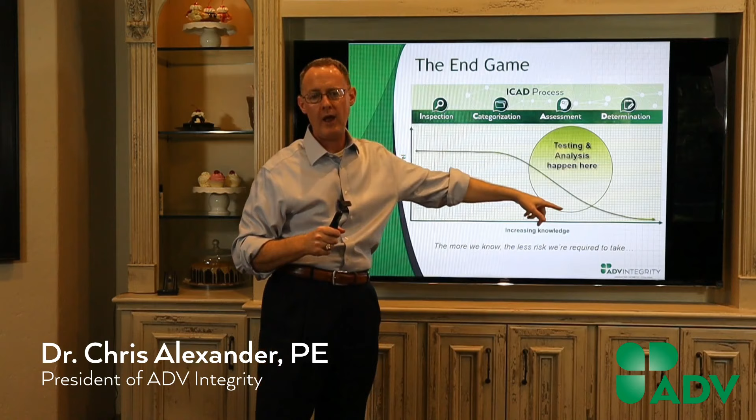So it's kind of the opposite of what we're doing with COVID. You know, COVID, you're flattening. We want to push it down, and we want to go all the way out to the right so that when we have to make a decision, we make that with as low a risk as possible. And the way that we do that is by combining analysis and testing and making these models get smarter and smarter as we move forward in time.

Now, in the pipeline industry, we only have a couple of things that we can do. Once we determine that something is severe enough that it needs to be repaired, we've got a couple of options. And those of you that know me know I love composite materials, composite repair. I kind of eat, sleep, and breathe them. Of course, we're going to talk about them in our case studies. So you can put a composite repair on most of the features.

You can put a steel sleeve on it, and that's always a viable option. We've been doing that pretty much since the inception of the pipeline industry. You can put a mechanical clamp. Those tend to be expensive and bulky, or you can cut it out. And so on the remediation side, those are the options that we have.

But I think a lot of times we make repairs on pipelines that if we knew more, if we got our increased knowledge, we might not even need to make the repair. So I want you to think about this ICAD curve as we go through this presentation today, because the goal ultimately is to lower the risk in decision making.

So there's a lot of words. I don't like putting a lot of text on slides. It's easier just to talk. But you know, the goal in testing is not just to blow stuff up. And matter of fact, we blew 2 pieces of pipe up yesterday. It's a lot of fun. We do it safely, and we'll talk about that here in a minute. That's not just the goal to destructively test things. The goal is to pull nuggets of information so that once again we make those models smarter.

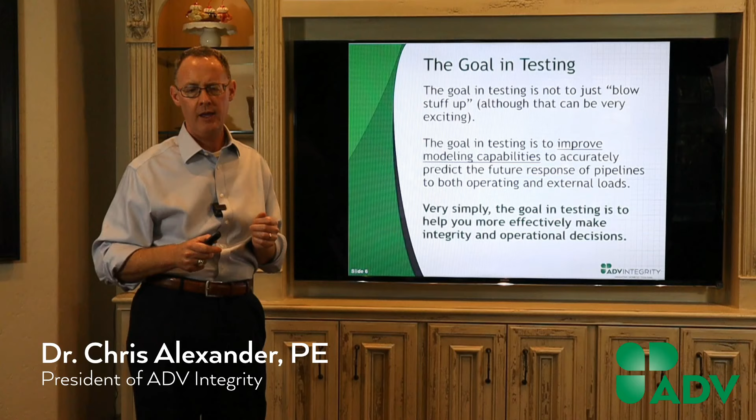And I think I've highlighted it in green here. This is really very simply the goal. The goal in testing is to help you more effectively make integrity and operational decisions. And so the insights that we get through testing, you'll see these in our case studies, provide invaluable information to help you manage that process.

Maybe in one of them we're looking at wrinkle bends, another we're looking at dents, another one we're looking at low frequency ERW, selective seam corrosion. So you have this myriad of features that you have to make an assessment process on. And then at that point, you figured out what the feature is, how do we need to test it? I mean, if I've got a vintage girth weld and I'm concerned about landslide movement, okay, doing a burst test on that is not overly useful or practical. I need to go to the test lab and apply bending loads.

And so we spent a lot of time, and I put a whiteboard up in one of the first slides. We spent a lot of time on a whiteboard designing what this test should look like. And you'll see that in the case studies. I've got 4 case studies that are very diverse. They're doing different kinds of things. They're applying different kinds of loads.

And then the big question that we got a lot of times is, do we use existing features that come from the field, or do we have to recreate those? The problem is, most of the time, we don't have all of the features that we want. We have a big project right now that we're doing with PHMSA and PRCI evaluating computed tomography. Idealistically, we need hundreds of hook cracks and low frequency ERW cracks and SCC features. We just don't have those, and the ones that we do, we don't want to destructively test those because we need to be able to use them on the inline inspection side.

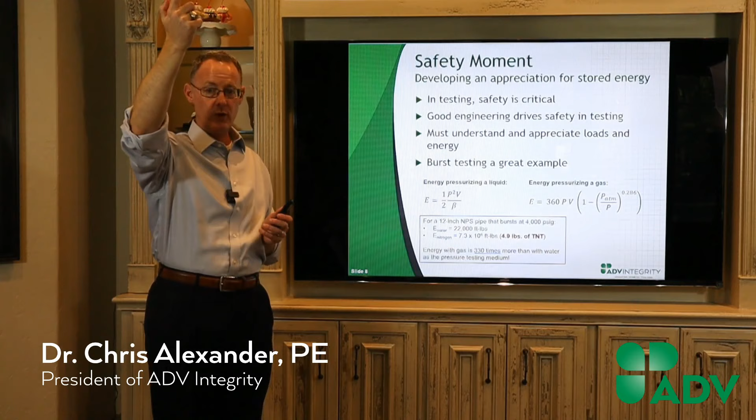But if I came up to you and I said, okay, I'm going to take 1,000 pounds, put it on a crane, lift it up, and drop it from 1 foot, that's equivalent of 1,000 foot-pounds. Now, if I raise it 20 feet in the air, you and I would both agree that you've got a lot more stored energy. If I raise it 20 feet, that 1,000 pounds becomes 20,000 foot-pounds of energy.

And so I've done a lot of drop tests over the years. We did one where we dropped 25,000 pounds from 30 feet. So that's 750,000 foot-pounds of energy. So when we're doing burst tests, we run calculations, and almost everything that we do involves water. We do hydro testing. It's a liquid. It's safer to do. It's a lot easier to do, and you get the same amount of information most of the time that you'd get in a gas test.

So we did 2 burst tests yesterday, and the burst pressures were around 4,000 to 4,500 psi. So you run through this equation right here. This is 1/2 P squared V over beta. I know there's at least a few non-engineers on here, so I'll explain what those variables mean. P is pressure. Typically in the US we express that in terms of pounds per square inch. Americans are the only ones that use English units; the rest of the world expresses it as kilopascals.

And so you got pressure, V is volume. In this equation, I do it in terms of cubic inches. Beta is a compressibility factor. I think water's like 330,000 psi. If you do hydraulic oil, that's a different number. So you have fluids that have a certain compressibility factor. And so you run through that, and it's not obviously very complicated.

And for a 12-inch pipe that blows up at about 4,000 psi, the stored energy in that sample is about 22,000 foot-pounds. So as I said, we did 2 of those yesterday. It makes a big boom. You want to do it in a stored container, but it's something that you can manage.

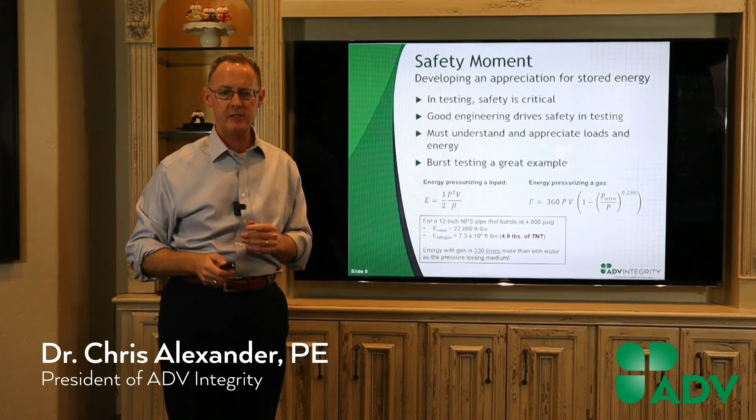And when we're talking about this presentation, we want to do things safely. So we're going to give you a little virtual lab tour since you can't come out and see us at Waller. Those of you that come out and see us, we usually have either Mexican food or barbecue being here in Texas. So you can envision being out at Waller with us.

So we started our test lab in 2019. This is what it looked like. And up here on the top left, there wasn't a whole lot there. It's just a big warehouse, had two 5-ton cranes, and just a lot of ideas about how we could do things. I don't have a photo of where it is today. The building is completely filled up. We've got load frames, and you'll see those here in the next couple of slides.

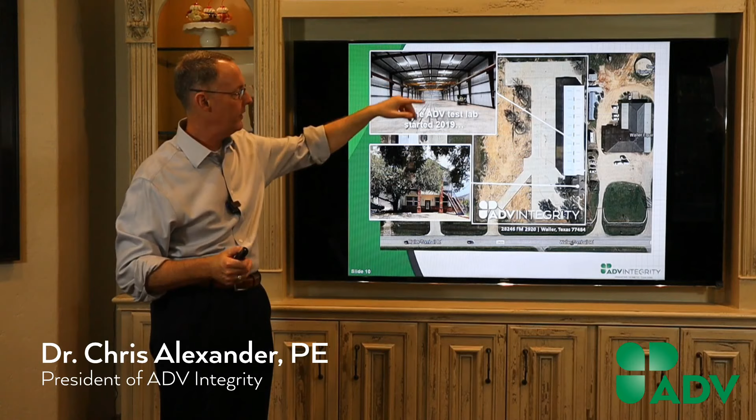We got about 4 acres. In the center section, I just pulled this off Google, we got a lot of land, and we've buried some pipe. I'll show you some photos here in a minute. So we've got room to do things. We've also got a pull rig that Rosen has loaned us that's kind of up in the back part of the property. And you know, we've made it our home. We've filled it up. I think when we first started, we had 6 people, and now we've got anywhere from 13 to 15 people in the building. So, good news, we've got a lot of things going on.

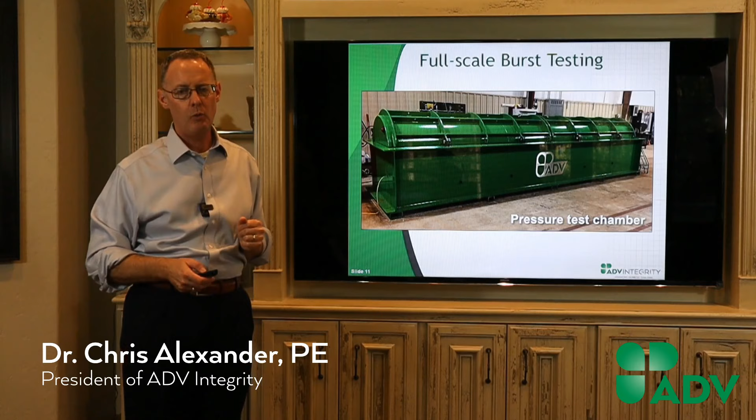Those of you on WebEx can't see it, but I'm pointing to brackets, and those brackets are held in there. We have pins, and basically when you have energy, that energy has to go someplace, and so it basically goes into this chamber. You can see some lines coming out. We usually have video cameras in there when we're recording. So we use this for burst testing, but we also use it quite a bit for pressure cycling. We have a test starting today where we're going to be pressure cycling a large diameter sample. So that gives you an idea of what we're doing. We have several other chambers where we do burst testing, but this is the biggest one that we've got.

One of the other things I talked about earlier is that when you are looking at designing a test program, you need to understand what kind of loads you get. And so early last year, we had 2 clients. One reached out to us in February, and I think the other was probably in April. And they both said, look, we need a test involving bending. One of them was a girth weld. Another program was looking at wrinkle bends.

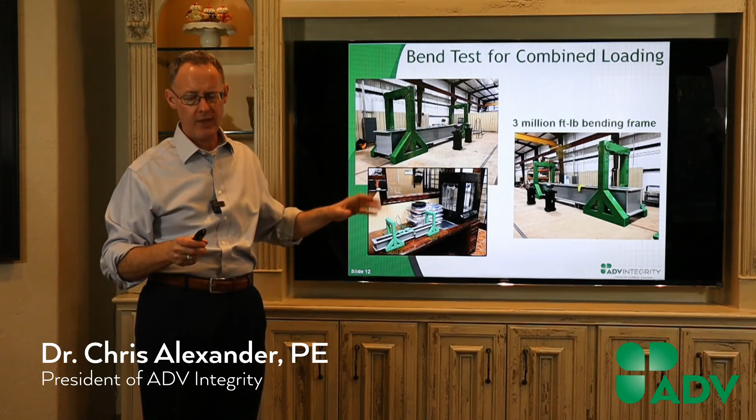I think going forward, 3D printing is going to continue to be a really hot area. And I know some of the oil companies are looking at it to make parts and components, kind of an on-demand manufacturing, if you will. And so we're excited about that. We've actually got some initiatives that we're working with some of the oil companies looking at that technology.

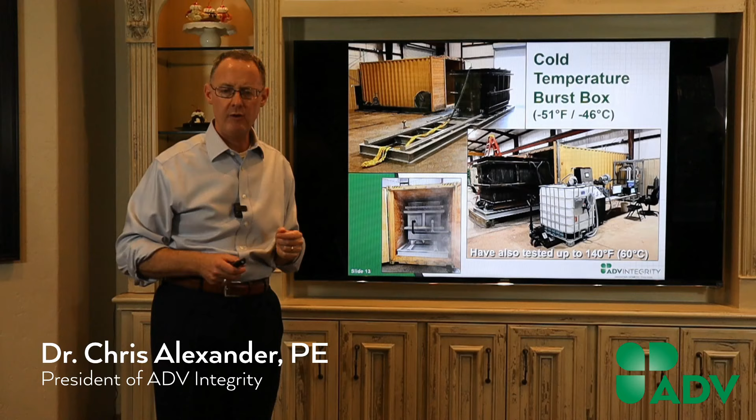The other thing, on occasion, especially with composites, there's always a little bit of a concern at elevated temperatures. So we've done pressure cycling on several projects, and we're getting ready to do another one where we heat the box up, and we have a fan that's basically blowing hot air, and we've got up to about 140 degrees Fahrenheit and heating those composites up.

One of the other projects that we're working on right now that I'm really excited about is we're looking at spoolable pipes. And it's interesting, within the pipeline industry, the transmission pipeline industry that many of you are in, you might not know much about spoolable. And so there's a whole part of the industry.

It's primarily in the midstream industry where you have very corrosive fluids, H2S, and you don't want to use steel, because if you did, you'd have to have some kind of CRA, corrosion resistant alloy, on the inside. And so we're making these spoolable pipes, and so you have a liner, a plastic liner, and then you have either a composite or you have steel that provides a structural reinforcement. So it's a really growing area.

And so one of the operators came to us and said, look, we're having some concerns with the connections. We've had some failures and would like to do a joint industry program. And my first JIP was about 15 years ago. It was actually my PhD work at A&M. And since then, I think we've put on 20 JIPs, and we're working on a couple more right now. And so it's kind of become a big part of my career, bringing people together.

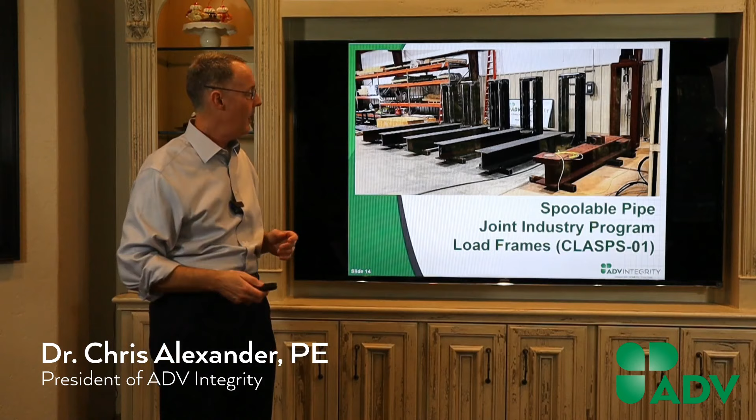So what we're doing is we have a hydraulic cylinder that we basically displace the connection, and we clamp down the spoolable, and so we're applying a bending load. And so we just finished our first round testing 2 of the companies. Everything went very well, and we apply a pressure for 1,000 hours, which in the composite world is always a good number. 1,000 hours at an elevated pressure, and then we applied pressure cycles.

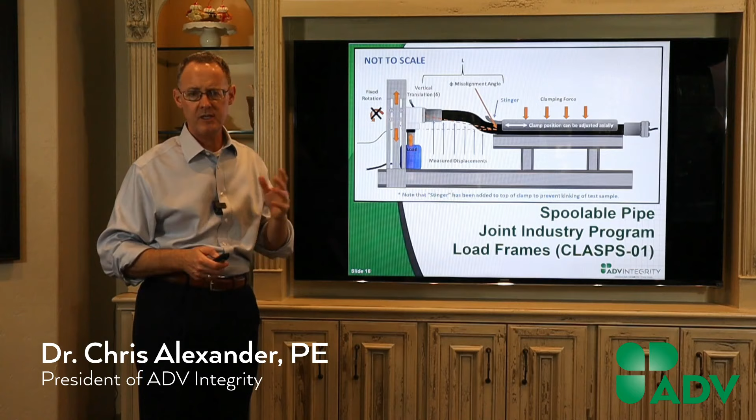And so we're really simulating probably 15 to 20 years of service in a relatively short period of time by applying 100,000 pressure cycles. So it's a good little program. If you're interested, reach out to me and I can share with you what we're doing. But as I said, it's turning into a really good little project.

One of the other things that we have, I did not envision when we first started ADV that we would have this, is a little Tinius Olsen machine. And if you've done any pull test, mechanical testing on steel, you've probably seen one of these and might have even used it in school. So we got one of these, and we have it hooked up to a hydraulic unit, and we actually can apply cyclic loading. And so we use that quite a bit.

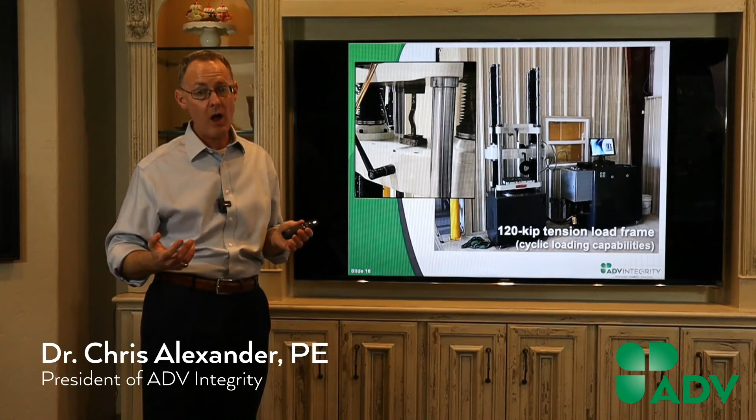Here's a little wrinkle section from a wrinkle bend that we've tested. We've done a lot of composite work on it, and it's become really a nice little handy tool. We've got some ideas on some other things that we're going to do in testing composites and other materials. In this slide here, there's kind of 2 areas I've spent a lot of my career. One is composites, the other is dents.

And I'll admit, when I was at A&M taking senior design class, I had no idea of all the opportunities in developing some capabilities around the dent area. I don't even know the number, but probably tested 1,000 dents over the past 25 years. If you remember, early in the presentation I talked about how we can either take features removed from the field or we can recreate them. In my entire career, I might have tested 3 or 4 dents actually removed from the field. So the vast majority of what we're testing, we're recreating.

It's not overly complicated, but we have an end cap that we press into the pipe. We pressurize the pipe because you want the area of the dent to have very high strain, and we're able to do that by pushing the indenter in. One of the mistakes I've seen people make when putting dents in is they just push into the pipe and then pull it out, and all that does is ovalize the pipe. So you really need to replicate what you're doing. And then we put it in our box.

Over here on the top right, you'll see a test that we did at the end of last year. And we had a strain gauge. And the highest stress area is what we call the halo. So if you were to take a flashlight and put it on top of a dent, it forms kind of a shiny area.

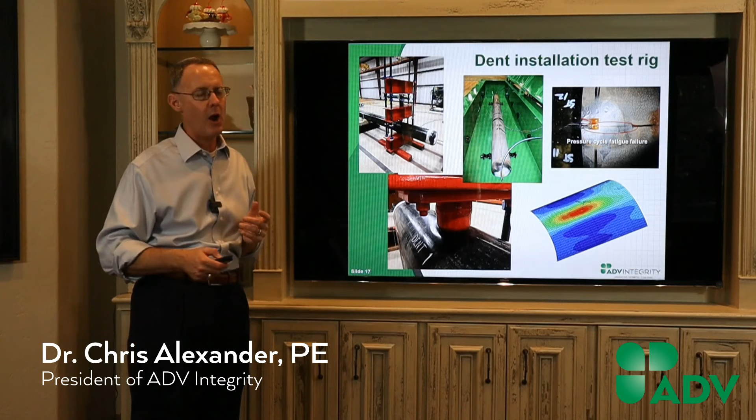Instrumentation. So Chantz and I have worked on this presentation for a while, and I just grabbed a bunch of images of instrumentation and slapped it on one slide. And instrumentation, in one sense, is kind of the unsung hero in testing, because if you run all these tests and you don't get good data, then you're really limited in how you can pull out that information. So, I've got pressure transducers, load cells, strain gauges, and you can see how a strain gauge is set up. This is a clip gauge that we use to measure deformation in a notch.

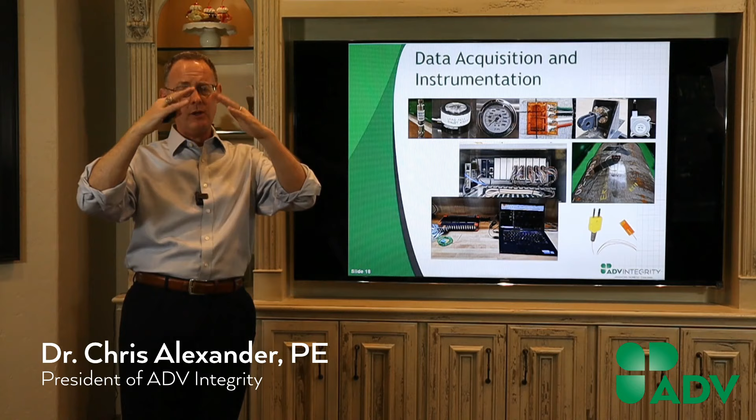And really the brains of the outfit in this is the data acquisition system. And so Chantz and Corey and our technicians have done a really good job building a foundation for us with a data acquisition system that not only collects data, but we use it to control things. And like I showed the bending machine, we actually set that up, and we can apply cyclic bending loads using all of this instrumentation.

One of my favorite sayings, I probably should have put it on my quote slide, is if you torture the data long enough, it eventually confesses. And a really good engineer will dig into it and eventually understand the mechanics. Throughout my career, my observation is some of the best engineers are those who are really good at analysis and who are really good at testing. Because you go to the test lab and you see how things work, and then you go back and you make your models sharp. So, that's a lot of what we're doing.

All of the engineers at ADV are actively involved in testing projects. And it's a lot of fun, but I think it forces us to think at a deeper level when things don't work. And a lot of you, we're working with you, and you get to come out and see this process that we go through. There's times it's very challenging, but I think, as engineers, we're always learning something.

So let's talk about some case studies. I do a lot of presentations, and I go to a lot of presentations, and I'm always more engaged when people talk about case studies. And when I go to a presentation and I just see a bunch of text on it, you're immediately going to lose me. I know when I go to church and I listen to a preacher preach and they tell great stories, I'm engaged in that process. So these are at least four of the stories of things that we've done at ADV.

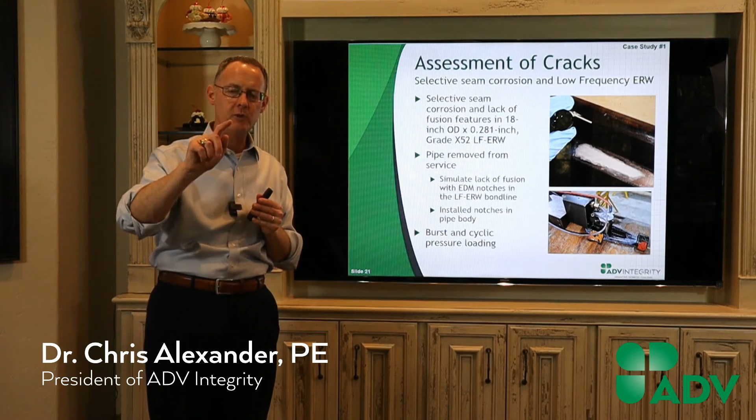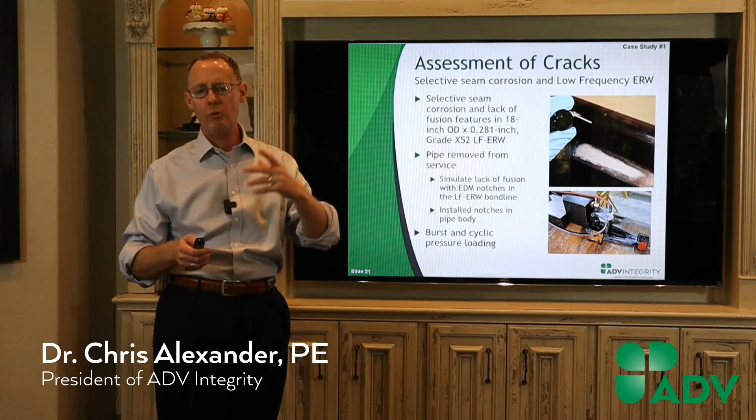This right here shows how EDM, electrical discharge machining, works. An EDM basically goes into the pipe and removes material, and you can get a very precise notch, and we'll show you that here in a second. So what we're trying to do is we're simulating features in that ERW seam, because it's very rare that we get pipe that has that in our lab.

So here's a couple of photos of burst tests. And those of you who are pipeliners, if I showed you that photo, within about 3 nanoseconds you could tell me what that was. That's low frequency ERW. So once you start a notch, it just runs. And this one fortunately failed at a pretty high pressure, so there's a lot of energy that drove that. If we'd had a longer sample, it would have kept going.

Now on the right there, and I warned you at the beginning, we're going to be talking about composite repair, so we had the same feature in that pipe on the right, and we had a composite repair on it. So that was actually the Atlas carbon fiber epoxy system that Milliken makes. CSNRI is the company now. And we've done a lot of work with that company. They have really solid technology in reinforcing cracks.

Now, over here on the bottom left, we've taken a section of one of those notches, and we've showed you the difference between a notch and a crack. And a lot of you know Ted Anderson. Ted's recognized as one of the fracture mechanics gurus, probably internationally. And I remember probably about 10 or 15 years ago, Ted and I were talking. He said, now Chris, when you're doing testing, notches are not cracks.

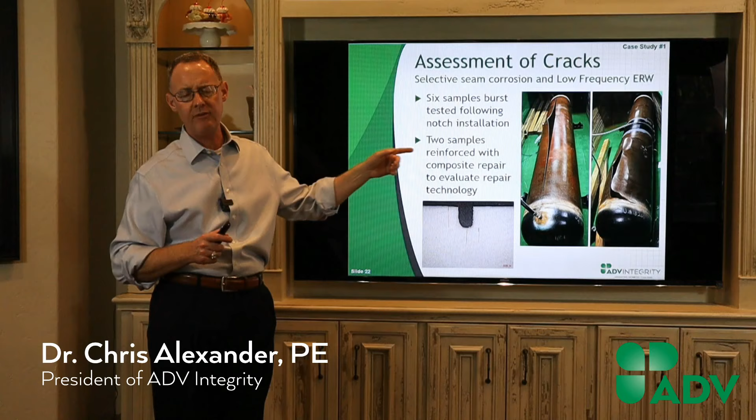And so this image right here clearly shows you, now we're pretty well zoomed in, but that is a notch that we've made. But until we apply cyclic pressure, we don't generate that crack. And so what makes cracks so dangerous is the sharpness. Now, a notch, if we didn't have a crack in there and you do a burst test, there's actually a thing called notch stiffening or notch strengthening. Sometimes you can actually get higher burst pressures by the presence of a notch if it's properly sized. Once you put a crack in there, certainly in low frequency ERW, and you do a burst test, it's going to look just like that photo there on the left. So a lot of energy driving these things.

So one of the other areas that we've got into when you talk about testing, it's validating technologies. And if you go to shows like I do, if you go to the Offshore Technology Conference, the International Pipeline Conference, we've got PPIM, Pipeline Pigging and Integrity Management Conference here in Houston every February. And you walk around and you visit with people in booths. Usually there's a sales guy there, okay? And you're going to ask them a few questions, and salespeople are great conversationalists. They're almost always positive, because if they weren't positive, they wouldn't be in sales very long.

And if you ask them, hey, does your technology work? The response you're always going to get is, oh yeah. Now, as the guy who's like the town doctor, a lot of times people bring technologies to us, and they don't perform to the same level that the sales guy is promising. So that's a lot of what we've done in the past couple of years, is we're working with technology companies, we're working with operators, and we're kind of in the middle, representing both sides.

And so it's super important if you're going to use a technology that it works, because it's dangerous as a minimum. Sometimes it's very expensive to use technologies that don't work. Well, we're doing some work. It's actually a very large project for PHMSA and PRCI looking at computed tomography.

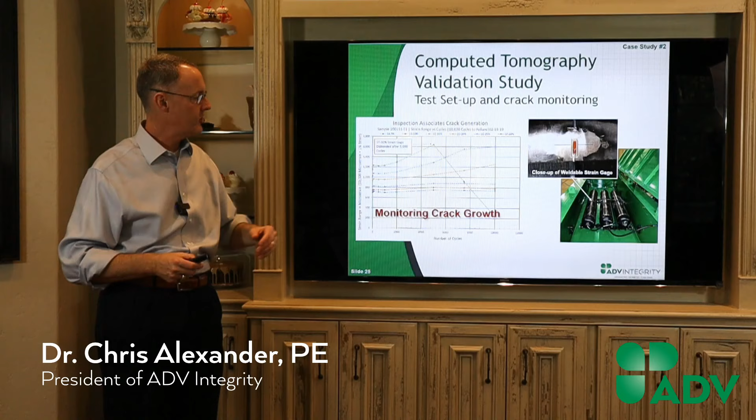I'm optimistic over the next 3 to 5 years the technologies are going to continue to get better, and we'll get a little bit more precise in this process. But this just shows 3 samples in our boxes we're pressure cycling. So once we pressure cycle to a certain target depth, sometimes we'll run all the way to failure. Sometimes we run out maybe 100,000 cycles, 250,000 cycles.

More often than not right now though, we just basically run to a certain number of cycles. Once we see a crack that's initiating, we stop it. And then we let the inspection companies kind of do their thing, and then we break them apart. And so this is just an image of the same notch. So basically the notch is 3 inches long. We split it right down the middle,

And in one side, we look down the axis of the pipe, and that's what you're seeing, what I'm calling the transverse view. The other image, we basically put in liquid nitrogen and we break the surface open, and that's what I'm calling this longitudinal view. And so if you look very closely, it's got obviously a lot of rust on it, but you can see the outline of where the original EDM notch is.

And when you pressure cycle, and if you've done any fracture mechanics work, we talk a lot about elliptical surfaces that are created. And what you notice is that's exactly what happened. If we had continued to cycle, eventually this rusted brown area would have gone all the way through the wall. So what you notice is most of the growth is going radially. There's probably a little bit that's growing axially, but at least with these features, most of what we saw was into the surface of the pipe.

So we break it open. It's relatively easy. Once you have it broken open, you can put it under a microscope and you can measure what the geometry is. That's what we're going to compare against the inspection technologies.

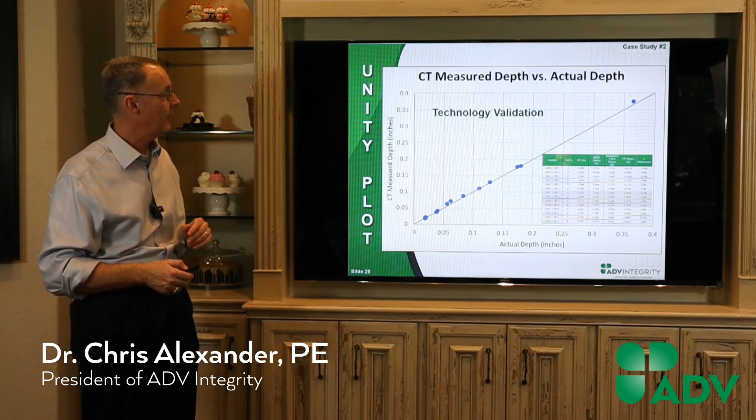Talk about case study number 3. I promise you we'll talk a little bit about composites. So if you rewind the clock to the mid-90s, most of the composite work that we were doing was repairing corrosion, and on occasion we were doing dents. And the first big project I did was for GRI, looking at Clock Spring, and we're putting a lot of dents in pipe and we're doing pressure cycling. So that's kind of how I cut my teeth in this industry.

Very few people today question the use of composites in corrosion and dents, certainly in gas pipelines. Liquid pipelines, because of the pressure cycling, there's some other considerations, but there's very few questions that people ask today. The questions that we're getting asked are, can you reinforce vintage girth welds? Girth welds from the 1950s that have seen significant bending loads. Can you reinforce cracks or crack-like features or planar features?

What about leaks? And our brethren in the downstream industry, the composite repair industry, has done very well. They do a lot of leak repair, but they tend to be lower pressure. They're not operating facilities at 1440 psi. They're lower pressure, perhaps higher temperature. But it's a different issue. Our pipeline industries are regulated, and so that regulation has additional oversight. And the other thing is we bury pipelines, and so you don't want to bury problems.

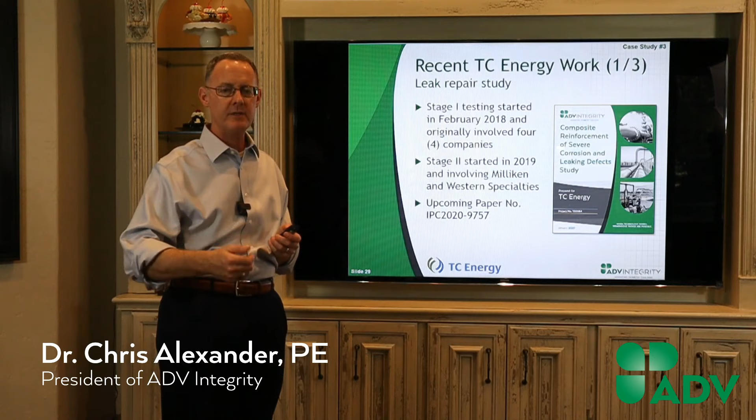So TC Energy funded a study, and I'm able to talk about it because we have an IPC paper that's going to be coming out. I don't have a lot of details. I just want to whet your appetite on the kind of things that we do. So the folks at TC Energy, we started working on this project several years ago and outlined it. And one of the primary reasons that they wanted to do it, we talk about in this paper, is they have small diameter pipe with relatively thin walls, so they're concerned about welding on it, but also you get very severe corrosion. What can you do with it?

So we tested all the way up to 85% corrosion. I've never built samples in my whole career this deep. So by the time we machined 85% deep on a 157 wall, there's not much left. I could take my Aggie ring and bang on it and probably could have immediately created a crack. So you've got a very thin ligament. We drill holes in it to simulate the leak. And then you can see some of the details. We actually tested some of the systems all the way up to 60 C, relatively high temperature for a composite.

We cycled up to 80%. In the US, most of our pipelines, transmission liquid and gas, the maximum pressure we're running to is 72%. The Canadians run to 80%. So because it was for a Canadian pipeline system, they wanted to really push the envelope. We did a lot of cyclic pressure testing, and that was part of the program as well. We even looked at surface preparation. That's always a big deal, but if you get 85% corrosion, you want to be really careful sandblasting on that. So it was kind of a dream in a sense. We got on a whiteboard and laid everything out, and it took a long time to do this program because of all the different facets.

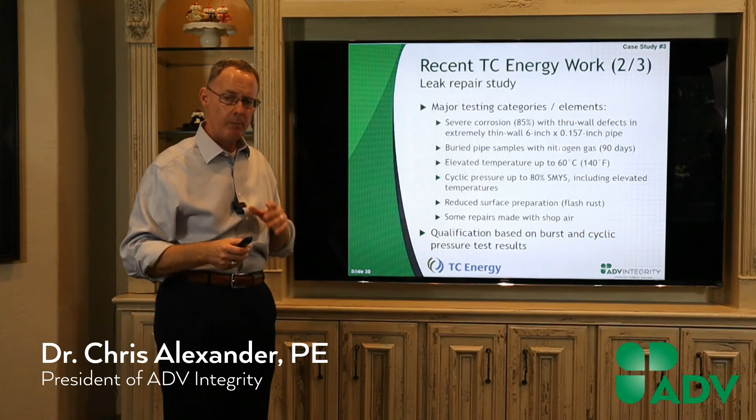And we even had some that we repaired with shop air. So we had air blowing inside through that hole, and the manufacturers had to figure out how to plug that hole and get a seal to happen. And so really impressed with the two companies that participated.

And I'll just give them a little bit of shout out. I don't know if they're even on the call today, but one of them is Western Specialties, and they have a technology called the composite sleeve. And they basically take a steel half shell, just like a conventional steel sleeve that maybe Allan Edwards would make, and they glue it on the pipe so it's adhesively bonded. And so they're able to get a strong bond, and then they put a composite over the outside of it.

The other technology that we looked at was manufactured by CSNRI. It's the Milliken Atlas Carbon Fiber Epoxy System, and we've done a lot of work with that technology, specifically looking at cracks. And so anyway, two very solid technologies who did very well in this program.

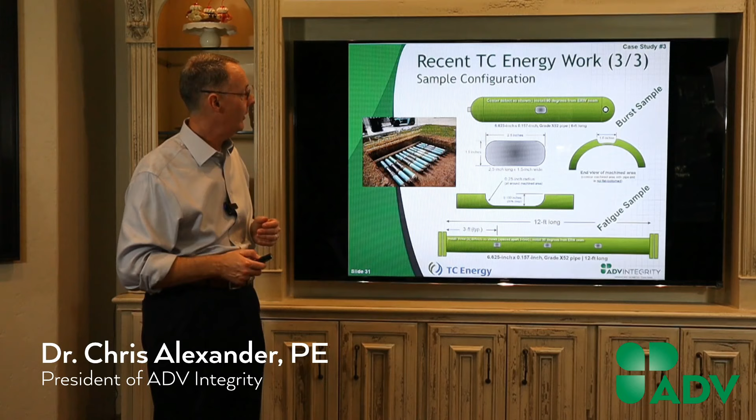So one of the last case studies I'm going to talk to you about is a technology that we started working on in 2018, actually kind of late 2017. And there's a technology called the pressure isolation tools. And so the idea is if I've got a pipeline system and I need to repair a valve or I need to replace a section and it's under pressure, how do I work on that pipeline? I don't want to have to blow down perhaps 25 miles of the pipeline.

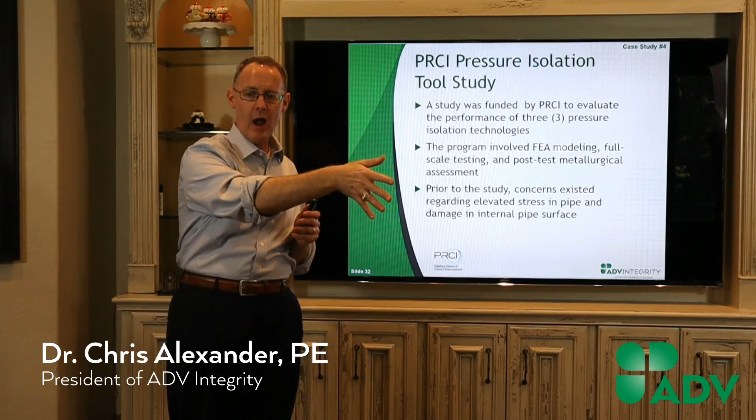So there are 3 companies that participated in the study. One is Stats, TDW, and then the Pipeline Pressure Isolation Group here in Houston, that we evaluated their technologies. And the way these technologies work is they put them in the line just like they would a pig, and it moves down and it basically remotely locks in place. And on one side you have a high pressure, the other side you have a low pressure. And so the next couple of slides kind of walk us through that.

So we run these tools down, and you have a high pressure side and a low pressure side. And so you run 2 of these tools and you set them, and then in the middle, let's say you have a valve and you blow off the pressure. So in an ideal scenario, I can come in and I can make a cut here, I can make a cut here. I've got the pressure on each side of these plugs, but in between I'm able to do the repair work and do the things that I need.

These are used very commonly offshore. Stats and TDW have I think probably a pretty thriving business when they have to go in and make repairs subsea. Subsea pipelines are very different though because you have thick walls. So the concern that we had with these tools onshore, and this was primarily driven by David Zhu with PG&E, was what happens when we have thin wall pipe.

And so you have companies like Marathon, PG&E, Colonial, you've got these larger diameters. Onshore we tend to be thinner wall. And so what happens when you run these tools through there, what kind of stresses are you generating in the pipe? So the way we started this thing was finite element modeling.

At its core, this was a testing program, but I'll give my hats off to David Zhu at PG&E. He's like, look, Chris, eventually I want to build some parametric models, but in order to do that, we need to build some preliminary FEA models, validate them, and then we'll be able to build this model. So it took us about 2 years, but overall the program really turned out very nicely.

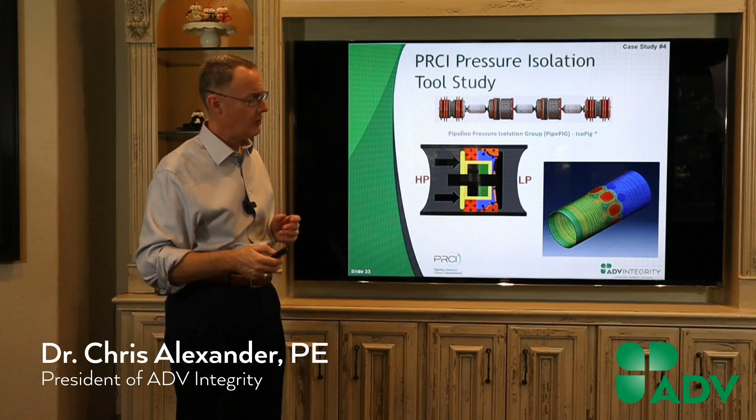So these are what the isolation tools look like. So as I said, TDW, Stats and PPIG came over. We had a pipe that was specifically for them, because what happens is when these tools seat, you've got seals and you've got basically teeth that engage mechanically on the inside of the pipe. We wanted to see what effect that would have on that inner surface.

So we didn't want to run one tool and then mess it up with another tool. So we literally would take 24-inch pipe, would cut it out. We had a replaceable section, and then we'd bring a new piece of pipe in. What you see with these red dots here is we've got the strain gauge locations.

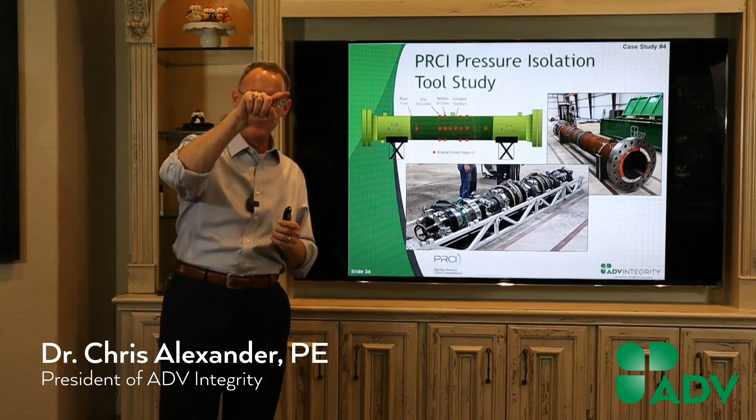And what we basically eventually figured out is every pipe has some level of ovality, and when we run hoop stress calculations, pressure times radius divided by wall thickness, we just always assume the radius is the same. Well, as you go around an actual pipeline, that radius varies. And so the hoop stress changes as you go around the pipe. Now, once you get to a pretty high pressure level, everything kind of normalizes. But when you're putting these tools in, they're generating a little bit of ovality.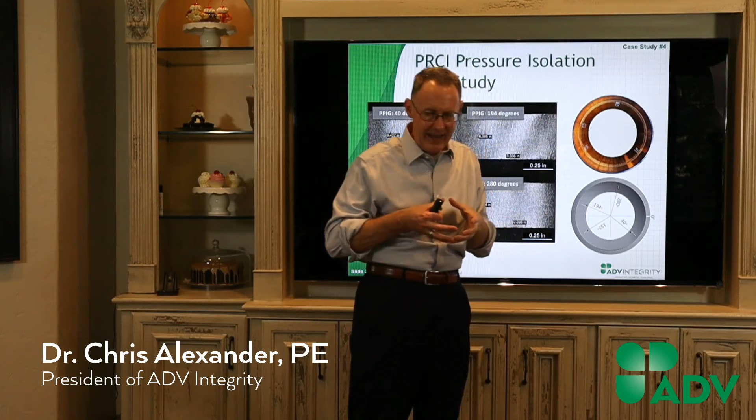So fortunately, Chantz spent a lot of time, did a great job really looking at that data, and eventually everything made sense. So as I mentioned, after the test was over, we basically sectioned the pipe. John Rickert did a great job, and you can see we found the areas that we were most interested in where the mechanical seals created these areas of interest. We sectioned them, and we looked at them under the microscope, and John did a great job.

And what we basically determined was, yeah, you have some markings that happen, but most of you know mill tolerance is about 12.5% of the wall thickness. We're well below that. So I think even if you had an aggressively cycled pressure system, you're probably okay with features of this magnitude. Now, if you had H2S and you had kind of an aggressive environment, it's something you might need to concern yourself with.

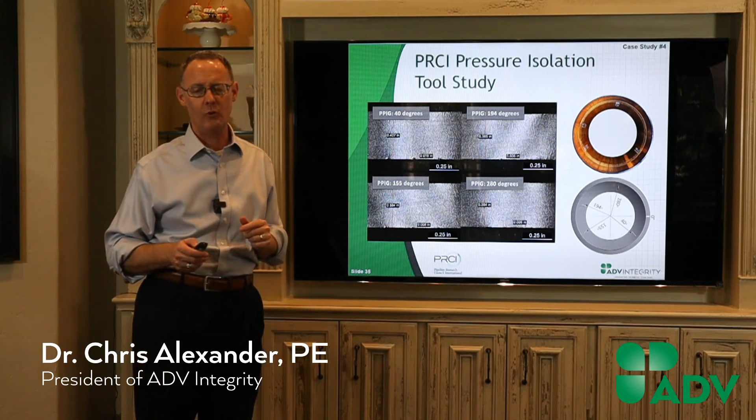Okay, wrapping it all up. Well, appreciate you hanging in there. Got basically one more slide. So closing things out, we started last year, looked through all of our books, and we did work for 43 companies that included 15 operators. And most of you today on this call are a pipeline company, and we appreciate the opportunity to work with you. We want to continue to do that.

As I talked about when I first started, we just want to be an extension of what you're doing. We're able to do a lot of creative things. I think we can come alongside you and help you solve those challenging problems, and we're doing 2 or 3 right now. They're really a lot of fun for us. It's a valuable resource as you make challenging decisions.